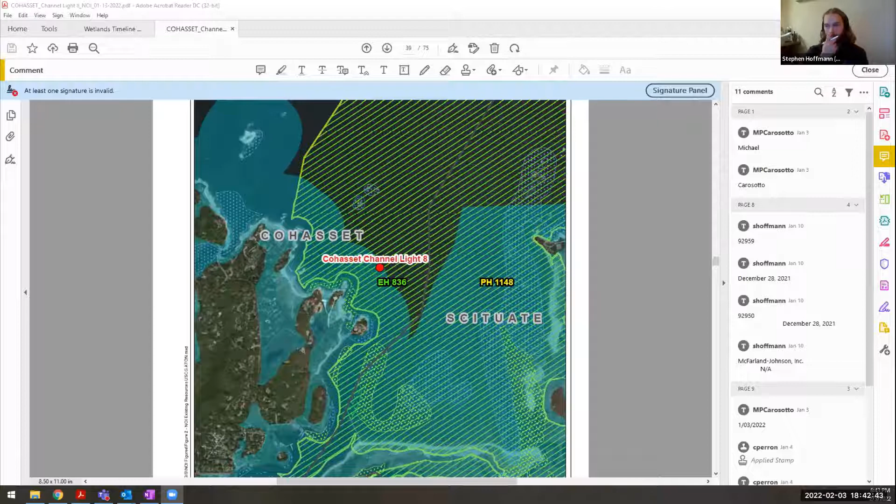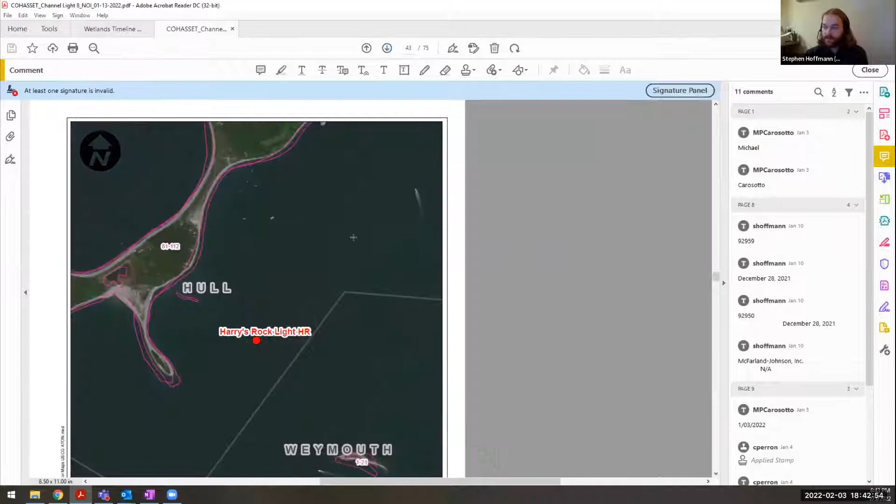So here's the location. I'm not familiar with any of the landmarks that you might be able to call out, but it's off the coast, approximately 1,000 feet or so, just off of Whitehead. Here's another figure without all the resource mapping on it that might be easier to see. Oh, okay.

Charlotte, do you have anything to add to this application? Yeah, I wasn't able to make it out to the site with the harbor master, but I did give her a heads up about this project and she didn't have any comments. I also forwarded it to the Department of Public Works, who also didn't have any comments. Instead of a site visit, I put my questions in the OneDrive for the commission, just in case they wanted to see what kind of questions I asked when I was reviewing the application.

I did see the correspondence back and forth, Charlotte. So thank you for the in-depth review there, and to the applicant for the comments that went back. I'm satisfied with the great questions, great review, and satisfied with the comments that came back. I guess it just looks like we would just need to condition this such that no activity would occur between May 1st and August 15th. Is that correct?

That's the BMP we included to avoid impacts to the terns that may be nesting in the vicinity during their active breeding season. After that time frame, the nest could be removed, it appears, shortly after the August 15th deadline, anywhere from September to February. In a perfect world you'd probably be shooting for an October, November, early December timeframe, since it doesn't really freeze out there, although it gets pretty cold.

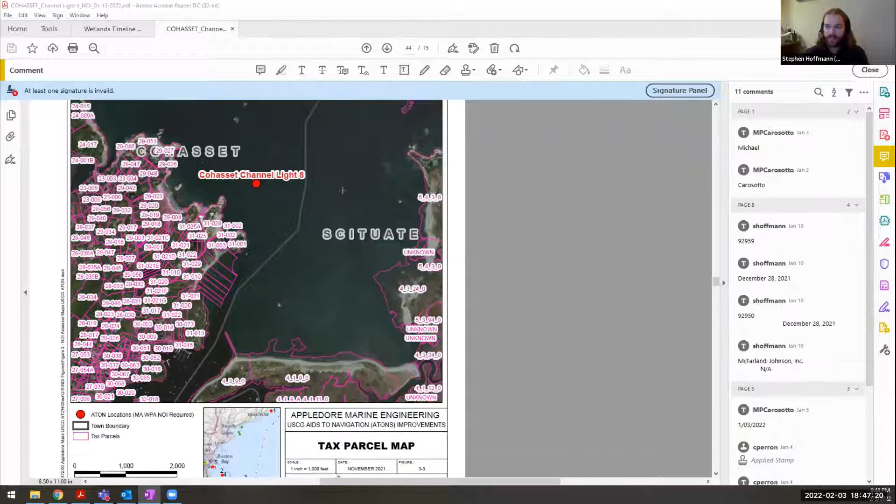As far as any sound or vibration concerns, the time of year restrictions are more out of an abundance of caution. I don't anticipate the vibratory hammer and driving of timber piles having effects felt or heard on land, since it's probably about 1,000 feet offshore. The time frame of construction is also relatively brief, looking at 2 to 3 weeks max, so it would be very short term and temporary in nature.

And how many of these are you doing on the coast? Looks like Hull, Weymouth there. How many structures are you putting in? There's 5 total, all replacement of existing structures that are just in need of replacement. You're going to do this over the course of a couple months, and once you start you're going to keep going? Yeah, that would be the plan, obviously dependent on weather and other factors.

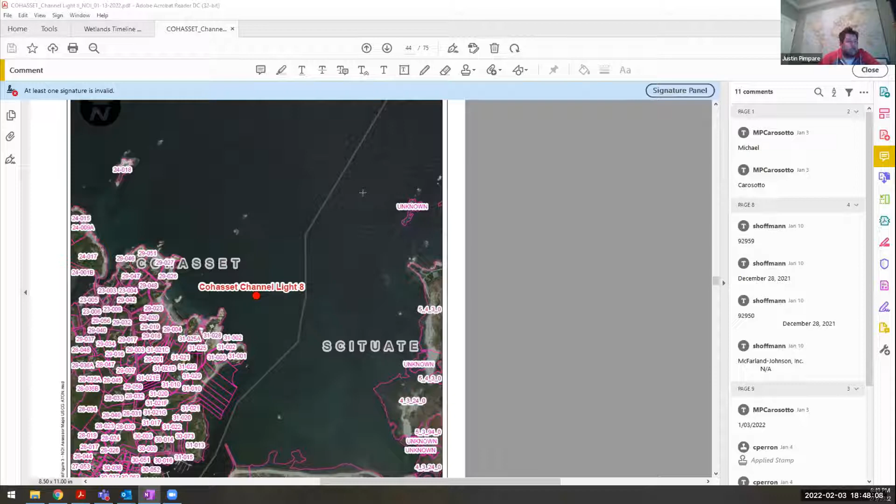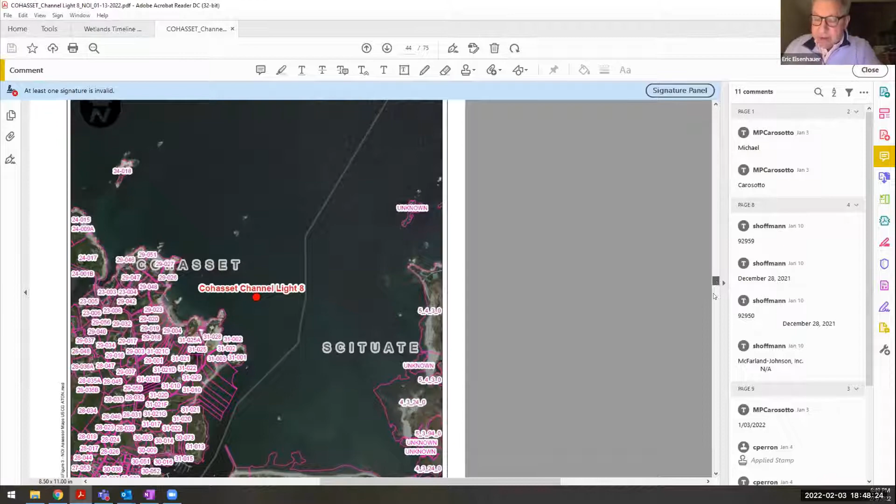Stephen, there's a number of diagrams here, pages and pages of unusual looking objects. Which is the one that's going in? Are you putting it in Cohasset? I see about 18 pages of drawings and photographs. You're looking at the plans? Yeah, I'm looking at your submission, I think it's pages 15, 16, and 17, but I'm having problems finding those numbers.

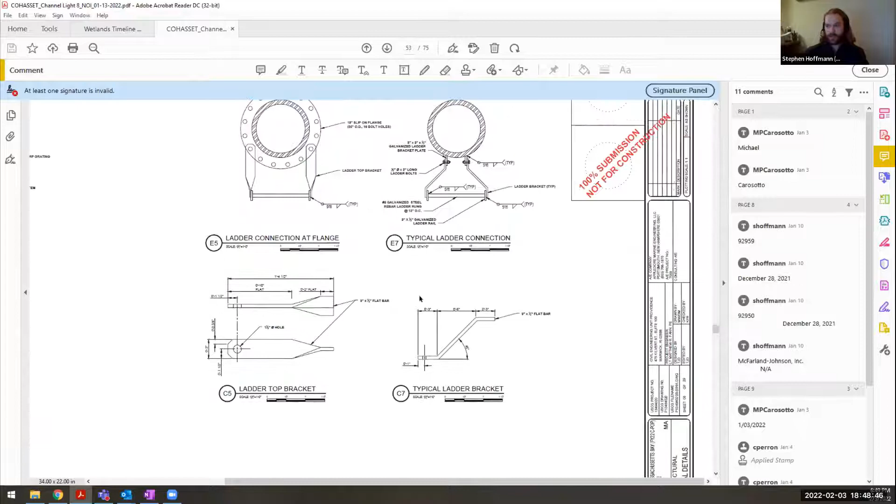I'm not sure, I'm sharing my screen still. Are you looking at the plan diagrams? I'm looking at Massachusetts Bay Repair Massachusetts, it's got all the photographs of the various items. Yeah, there we go. Which is the one we're getting? You'll see down in the bottom right corner, it says this is the Boston main channel light.

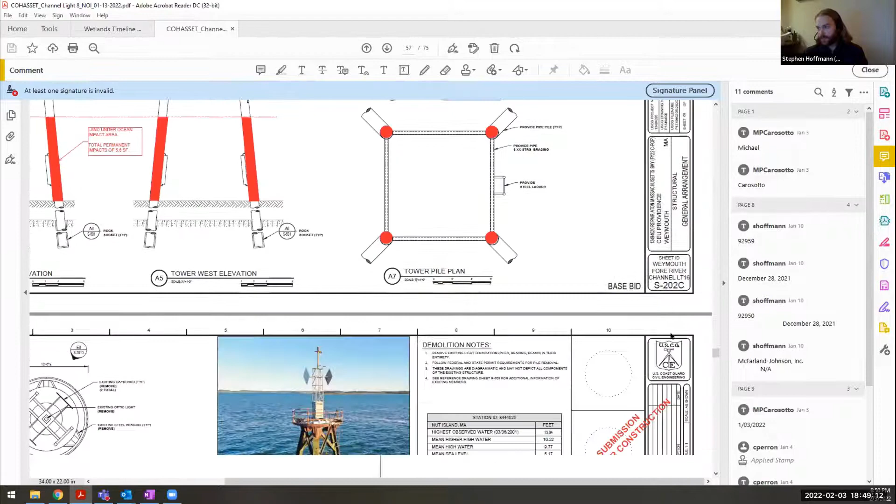So it's one project, we included everything, all the plans. Let me find the page numbers for you. Oh I see, here it is, that's it. It's kind of hard to view, I'm viewing it on my phone, my computer isn't working. Yeah, it's probably tricky to view these plans given the size of them on a phone.

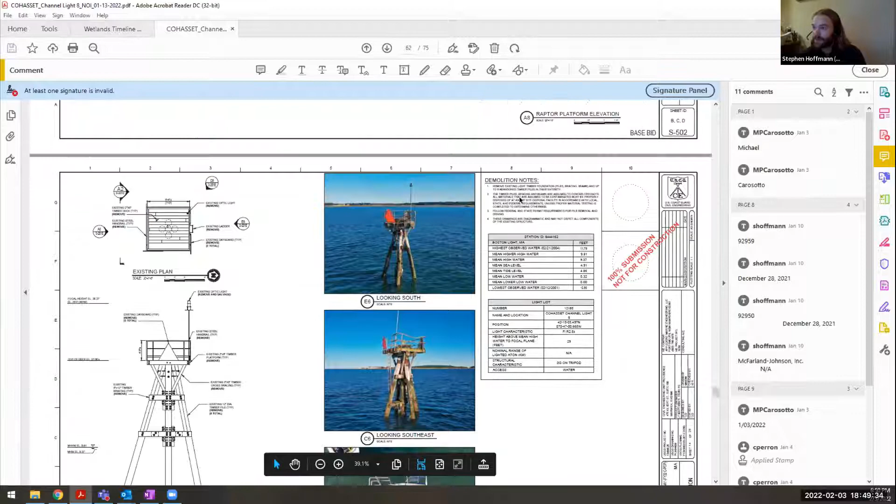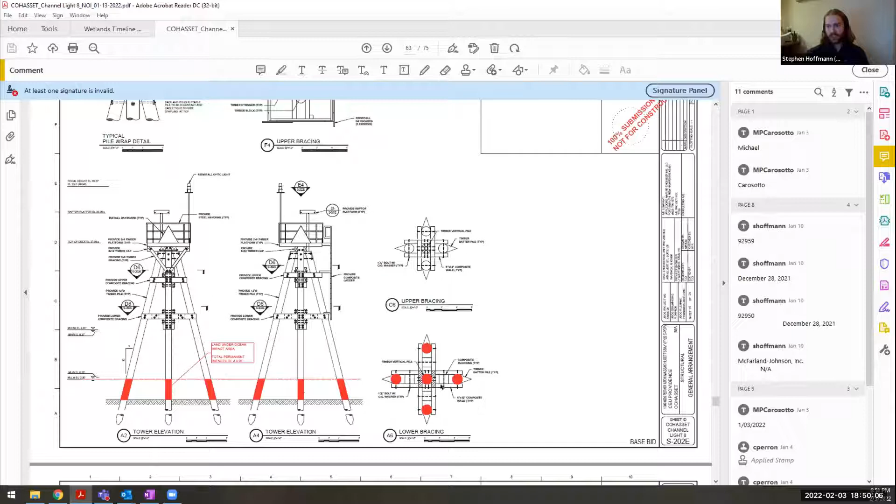In the PDF it's page 62, and you'll see down in the corner here there's a photo of the nest on the platform as well. So the object we're looking at now is what you're taking out, right? Yep, that's the existing structure. The proposed structure is shown here, which is more or less an in-kind replacement with some minor modifications to the nesting platform and those features, but as far as the structure goes, it's a 5 timber pile substructure, just like the existing.

Eric, in that PDF, it's on pages 14, 15, and 16. Okay, thank you very much. You're welcome, you're very astute. The right-hand corner of the bottom of the page, a little box that says okay.

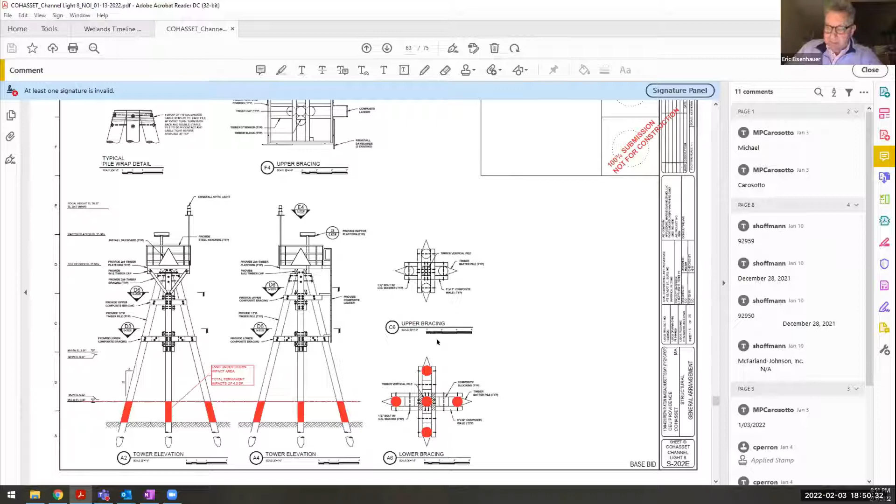What's wrong with the current structure? It's not necessarily clear in these photos, but it's an older structure. It's been there a while, I don't know when it was originally installed, but the timber piles are deteriorating and it's been identified as in serious condition and in need of replacement. It's just an old structure.

All right. Any additional comments? No comments. I'll entertain a motion.

Jay Pimparo make a motion to issue an order of conditions for the U.S. Coast Guard project NOI 22-03 with a specific condition that no activity is to occur between the time frame of May 1st and August 15th.

Do I have a second? Second. Having heard a motion, a second to issue an order of conditions for NOI 22-03, take a roll call vote.

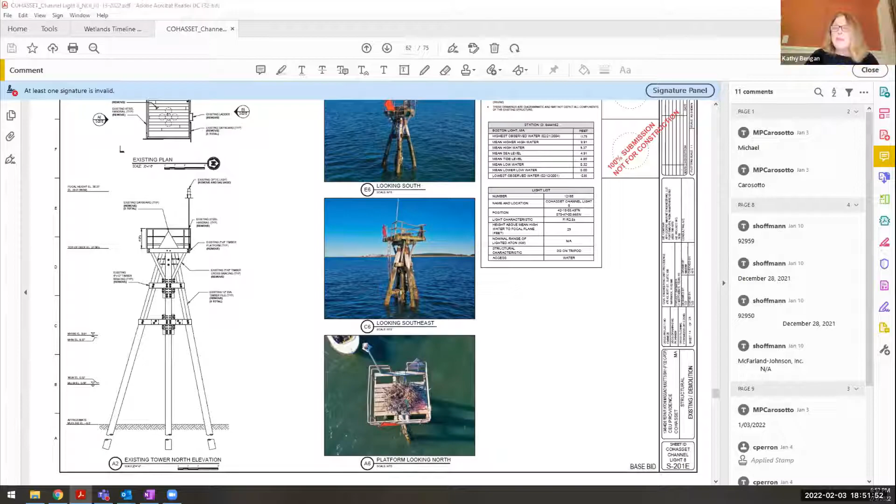William Ashton, aye. Tom Bell, aye. Kathy Berrigan, aye. Eric Eisenhauer, aye. Trish Grady, aye. Jay Pimparo, aye. Chris Macfarlane, aye. That vote passes.

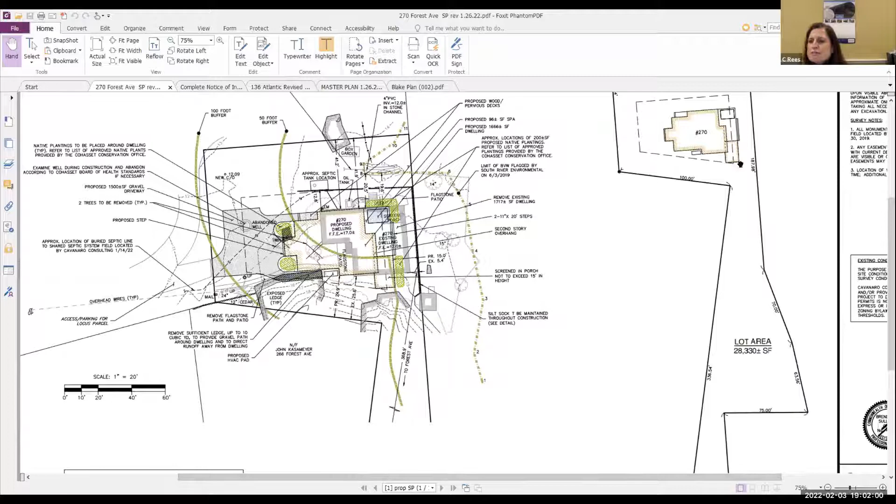Okay, there's nothing existing there? No, nothing existing there. That's for zoning. The existing home measures 5 feet from that property boundary.

There you go. Eric, if you give me a second, I'm just going to outline the existing. Thank you.

That's about it. He gets paid big bucks for this, by the way. I was gonna try to bring up my pen, but then it gets messy. Our chairman had a very steady hand.

That's the existing, and then the proposed is doing something like this. There's a 200 square foot covered porch proposed on the north side, but that's the majority of it. The porch is here.

Does that look better, Eric? Understand that? And then the patio, I'm just gonna make an X instead of an outline. Patio is there.

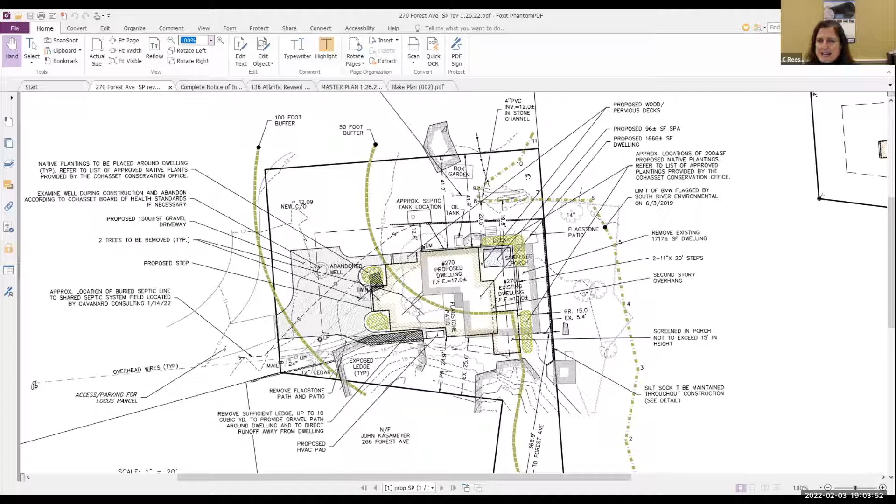What is the, kind of need some glasses to zoom in there, the existing foundation elevations, are they staying the same? Pretty much. They're gonna try to pretty much stay the same and take out the existing, is that 17 feet? 17 to 17. They're trying to kind of use what they can. So not really a lot of heavy excavation, it's more demolition than anything.

Yeah, I mean, the home does extend over here to the south, but yes.

So the only building that's happening within the 50-foot buffer that is not inside the existing footprint would be this small little corner right here. Is that correct? Correct, correct, yes. It comes up here, just that tiny bit, but it's only that little bit that's within the 50-foot buffer.

I think you double that, go up twice as tall. It really ends here. Yeah, but that would be within the existing footprint. Oh, correct, yes, you're right. I'm sorry. Yes, just that little strip is outside the existing footprint.

Chris, did you have the other drawing that you had the red ink pen on? Sorry, I got rid of it because once you move the drawing, it doesn't move with it. But I'll give you a quick one on the existing again, because it's a pretty simple shape.

So I'm gonna assume that there's no underground natural gas line to this part of town right now? No, and they're gonna keep existing utilities pretty much because the footprint overlaps. They'll probably truncate where they hit the house, but they don't plan on moving utilities.

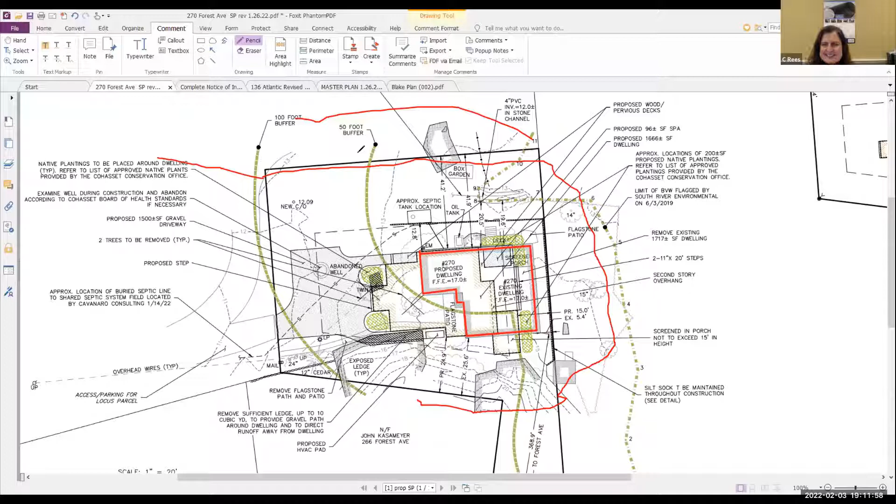Yeah, you're along our property line, but there's the neighbor to the west of that - there's a good portion over here, more trees up there, even higher. I'm sorry, you're saying that it's woods between that line and the house, or away from the line? Over here more, probably, away, or up north - so up is there, here.

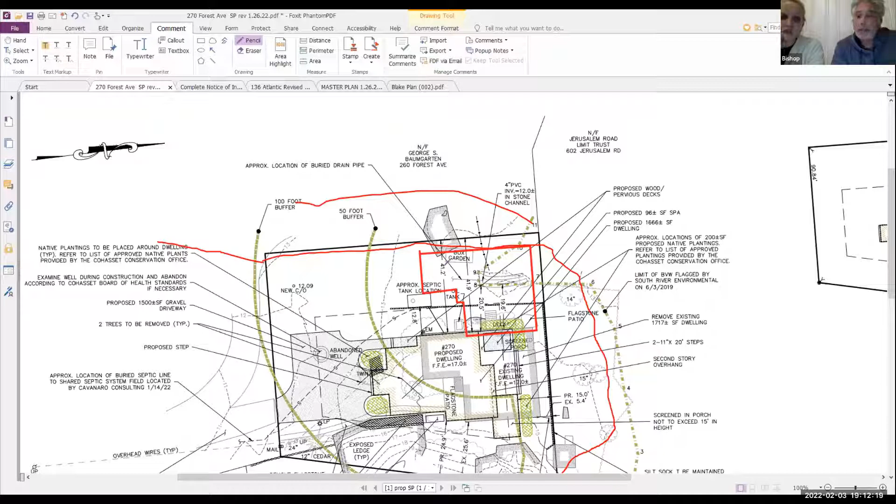Would there be an opportunity to plant some trees to replace the ones that have been removed? Yeah, absolutely - one of them's actually dead, and the other one we would love to replace. And I think there's a lot of opportunity on the plot to add plantings.

Any other questions or comments by commissioners?

No, my only comment is clearly there's a lot going on here. There's an existing home that is probably saving this project in the fact that there's a significant amount of work going on in the 50-foot buffer. However, there is an existing home. It appeared that the square footage in the 50-foot buffer of impervious area was being reduced from 1490 down to about a little over 1,000 square feet - so roughly about 450 square feet of impervious area was being removed.

It sounded by the removal or pulling back of the house from the wetland that the current house, now about 33 feet from the wetland, is being pulled back to about 48 feet. So when I look at these projects, these are some of the things I look at - trying to get as far away from the wetland as possible and reducing impervious surfaces. I commend the engineer for not just building on the existing footprint, and for being cognizant of the 50-foot buffer while dealing with the building setback. So I don't have any additional comments.

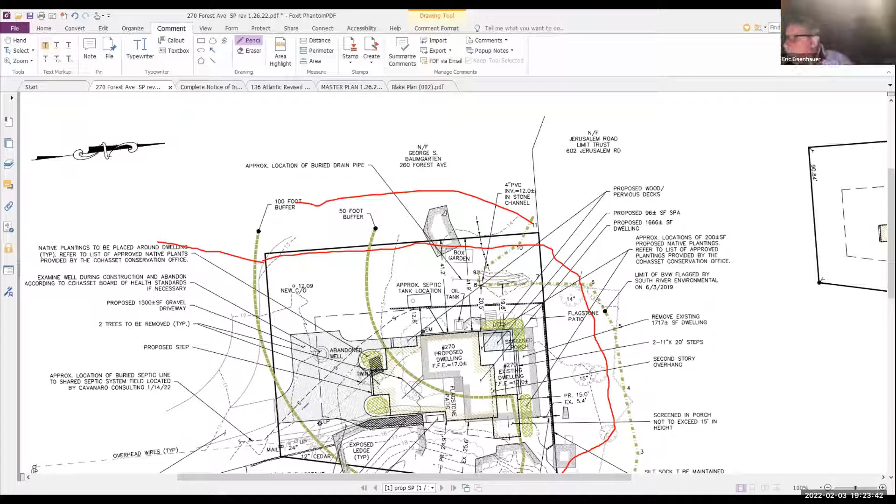Take a roll call vote. William Ashton, aye. Tom Bell, aye. Kathy Berrigan, aye. Eric Eisenhauer, aye. Trish Grady, aye. Jay Pampari, aye. Chris Macfarlane, aye. The variance passes 7-0. Thank you very much, good luck.

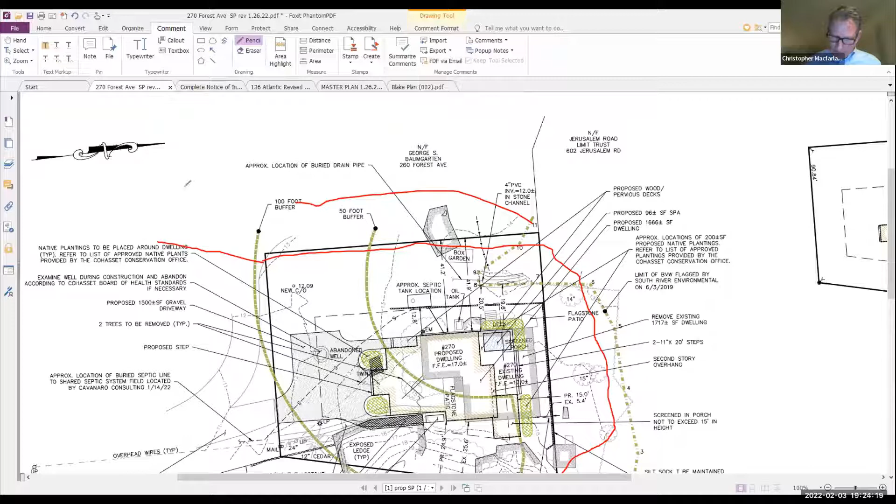The next hearing this evening, I'll read the notice of public hearing in accordance with Massachusetts General Law Chapter 131 Section 40, the Cohasset Wetlands Bylaw, and the Cohasset Stormwater Bylaw. The Cohasset Conservation Commission will hold a public hearing on Thursday, February 3rd, 2022 at 6:30 p.m. via remote participation on a Zoom platform for Notice of Intent 22-05 and Stormwater Permit 22-02 for Liana and Ethan Myers to install a pool, patio, pool house, and assorted hardscaping and landscaping at 136 Atlantic Avenue.

Caroline, I do not see the owners, but please correct me if I'm wrong. Okay, I can't see the participants. I thought... okay, sorry, yeah, I don't see Myers. It's Liana and Ethan Myers. No, I don't see him. Okay, if you're there under a different name, just raise your hand.

Just FYI, ladies and gentlemen, school's out early tomorrow in Cohasset, early dismissal due to the weather. It's your public service announcement. Thank you, good call. You get to sleep in, Jay. I didn't know about the early dismissal. Oh, that's early for you.

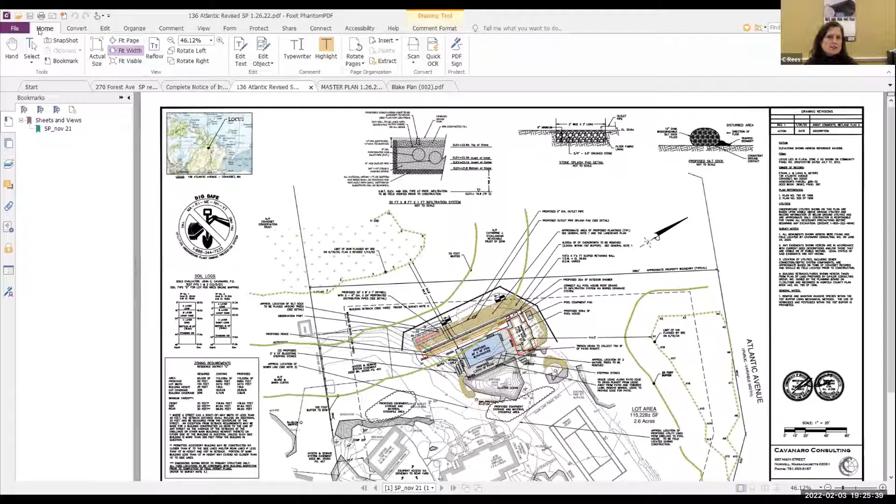Okay, all right, should I go forward? Yeah, could you blow this up a hair before you do? Certainly. For the record, my name is Caroline Rees from Cavanaro Consulting in Norwell, Massachusetts. I am representing the applicants, Liana and Ethan Myers, homeowners at 136 Atlantic Avenue.

The homeowners propose to construct a pool, patio, and pool house in the rear portion of their developed lot. This lot is approximately 2.6 acres. It borders Atlantic Avenue to the north and east sides. Here's the main dwelling, and it borders private properties on the remaining side. Atlantic Avenue comes around here; here's the dwelling, a driveway that comes up, a detached garage, a large tennis court area, and then in the rear yard is where the proposed work is. Is that big enough? Should I make that bigger?

Slightly bigger would be helpful. Yeah, a little bigger, please. Thank you. Certainly.

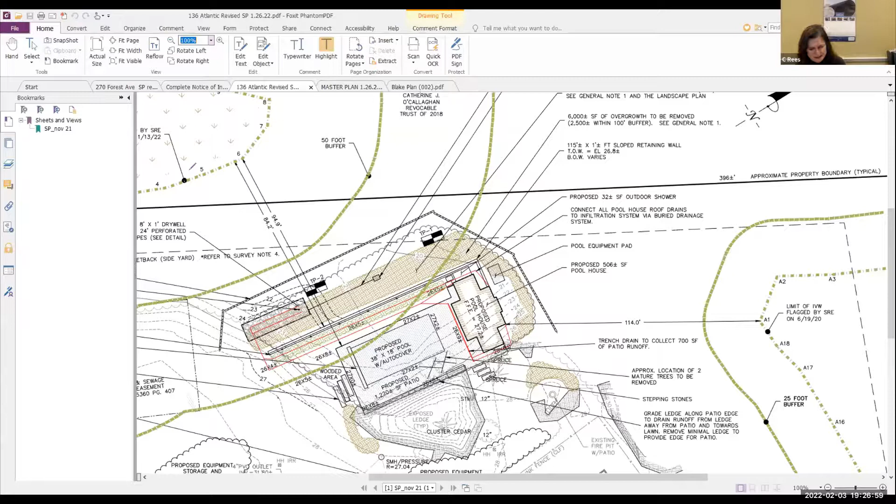That kind of shows it. On the lot, there are 2 resource areas that have been identified. One is a bordering vegetative wetland that extends from the east corner of the lot. The other is an isolated vegetative wetland on the north side of the lot, abutting Atlantic Avenue.

As you can see, a portion of the work extends into the 100-foot buffer of the bordering vegetative wetland. So a notice of intent was filed, and the project would increase impervious area, including the pool, by about 2,600 square feet. So a stormwater permit application was submitted as well.

The homeowners plan to petition to locate the pool and patio along this area ledge, using it as a natural feature. There's a very steep drop off of the ledge here, and they plan to abut the patio up to this ledge. There is a significant drop in topography behind the ledge, so they'll bring in some fill to support the pool and patio.

They'll support that with about a 115-foot retaining wall, with a max height of about 6.5 feet at the corner. There's also a 506 square foot pool house proposed here.

To address the stormwater issues from the increased impervious area, a 30 by 8 by 1 foot infiltration system was designed and is located at the toe of the wall. This will result in a decrease in peak flow and volume for all rainfall design events.

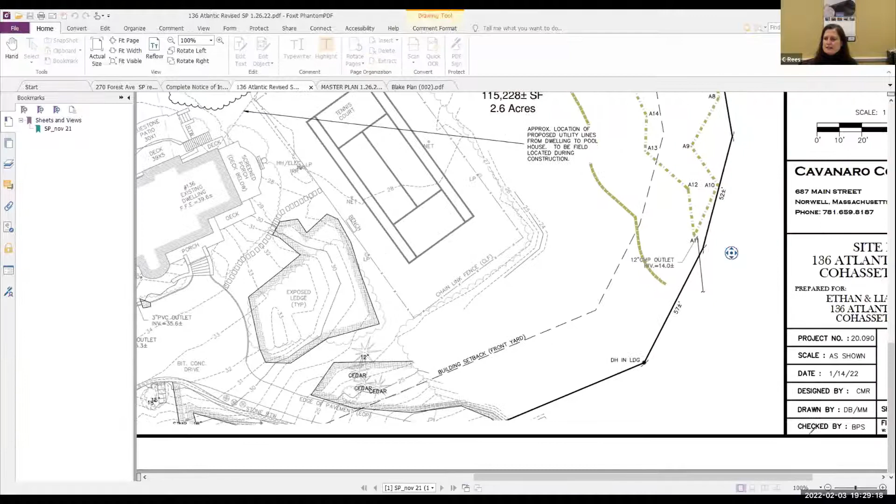The proposed work is over an area that's not really woods, more of a brush area.

What we found in some old plans from the late 30s is this area was developed as a garden area, so that may explain why there's more low-lying brush back in this area.

2 trees are proposed to be removed as part of this project. They're outside of the 100-foot buffer, but those are the only 2 trees of decent size that would be proposed to be removed.

There's significant landscaping proposed as part of this project. Up here in the elevated patio area, these plantings — I do have a landscape plan, I don't know all my plants, but I can bring that up. The plantings here are not native, but they are non-invasive.

There's some hydrangeas, and a dogwood that I think is a native tree, but I can bring up the planting plan. These plantings are separated from the BVW by the retaining wall, and then there are plantings at the toe of the structure. Within the 100-foot buffer, that's about 12,000 square feet of native plantings and grasses, which we're hoping will provide a buffer to the BVW in that area.

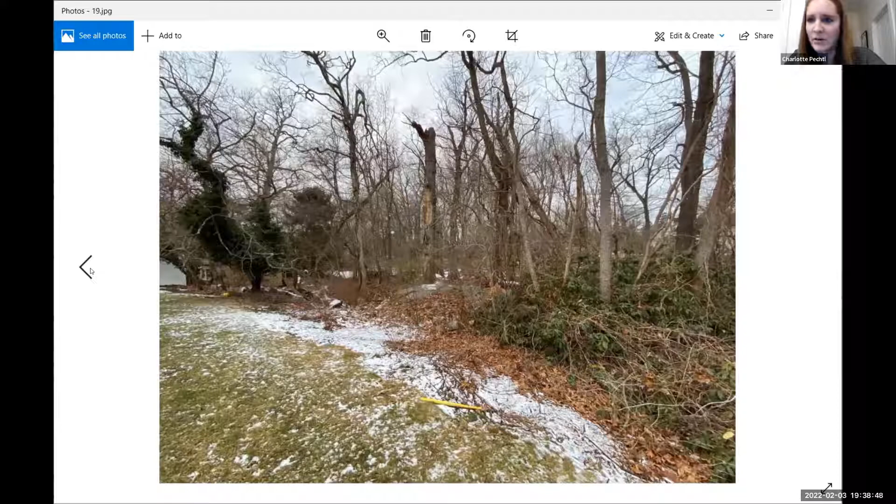And then those are just pictures of the wetlands flags that were in the back. Yeah, it's really kind of in that area. That looks right, because I remember the balls.

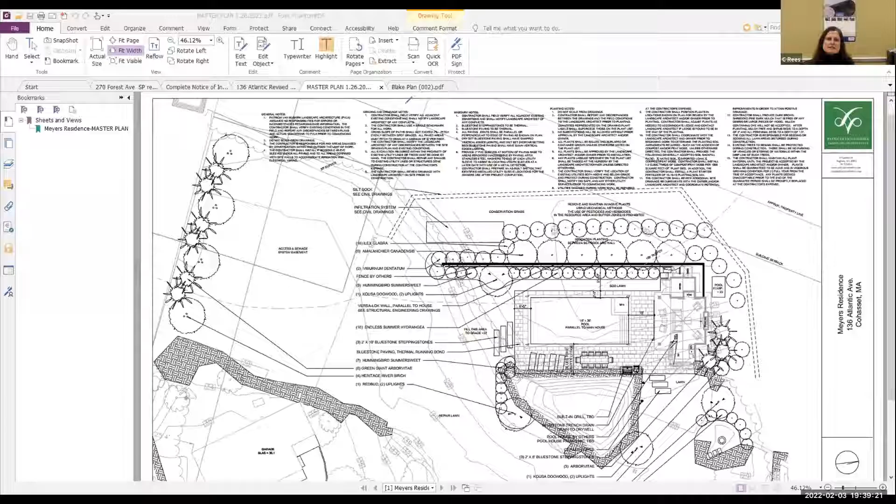I can tell. But Carolyn, would you mind sharing your screen for a moment and putting back up the actual diagram? My question goes back to the elevations, you might have to really blow it up. I'm looking at it on a different screen here. That's the landscape and then the site plan. Right, if you could blow that area up exactly right there, that would be great. Okay, that's actually a perfect size.

So I see that you've done two test pits. The test pits are in an area where it looks like you have decent soil, but they seem to be away from where there's actually going to be some true digging. The proposed 1,220 square foot patio and the actual pool, I'm assuming this is an in-ground pool, are right up against that exposed ledge. I know it drops off there, but my question is what are the elevations over there as far as the bottom of the pool? Is there going to be any digging into the ledge? Is it going to be a fill area or more of a cut area?

More of a fill area, quite a bit. Right here you can see this is elevation 21, 22, 23. They're bringing this area up to elevation 27, so there will be some cut and fill. What we can tell is they're hoping that ledge is deep, and they tried to leave adequate room to avoid having to blast ledge to place the pool. But the drop off here is about 23 feet, so you have about 4 feet of depth.

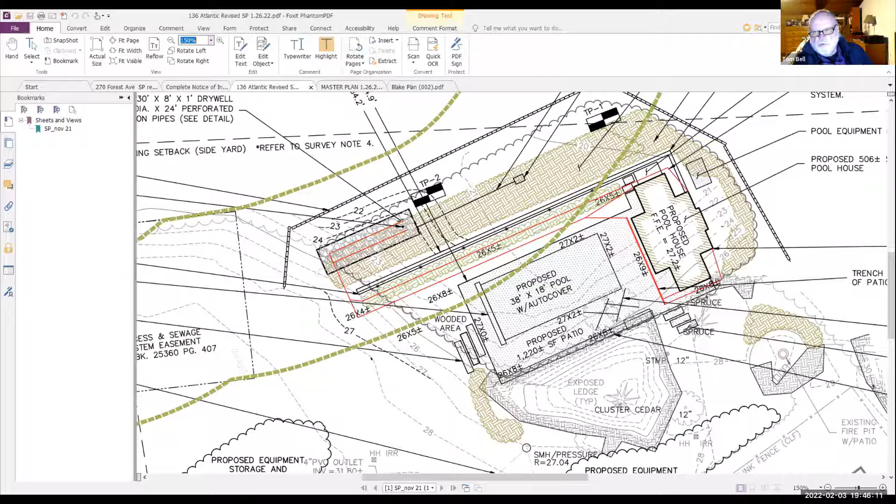All right, Tom, were you going to say something, Tom? Yeah, I want to get back to the classification of the resource. The state has indicated a potential vernal pool or pools on this property. Can you comment about that, Ms. Rees? Yes, we did find on Mass GIS a potential vernal pool.

It's located directly under the house, like kind of smack dab in the center. It's hard to tell where it was intended because the house is dated from the 1900s. So there's just a data point. It's right about here, right about the E in existing, I would say. But because it's located under the home as a potential, we couldn't really find out where that was intended. There's certainly not water under the home.

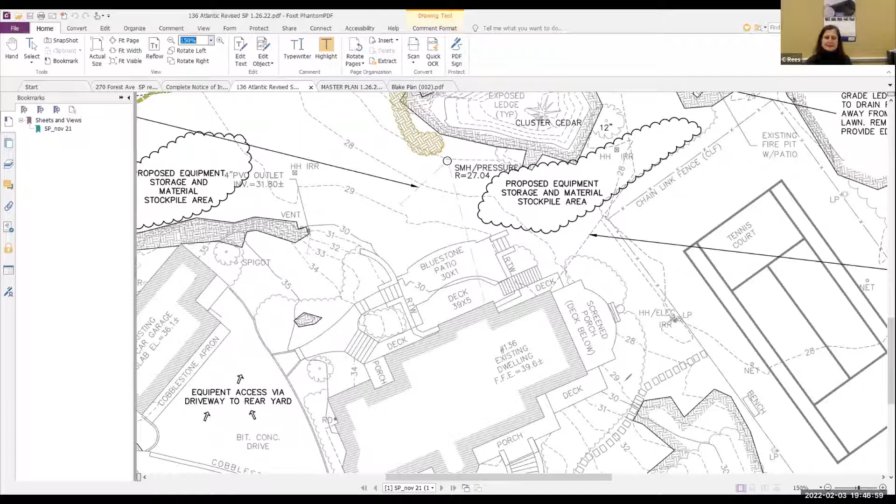The ground slopes away. Did you contact DEP about this? I know I haven't. Yeah. I took a look at this, looked at the topography here in detail, and I haven't contacted DEP either. It's my understanding that all of these were done, all of these potentials and all the potential vernal pools were done in one pass. I believe it was in 2010, if I remember right.

And so the people that did it are still around, and I think that it would be good to explore what they had in mind here when they put that marker. They obviously, that house predates 2010 by over 100 years. So my own feeling about it was that they put it, there's a number of potential, what appear to be potential vernal pools surrounding this property and on this property. And what I've seen they do in the past is they don't put a marker for each one. They put a marker in the centroid of the cluster.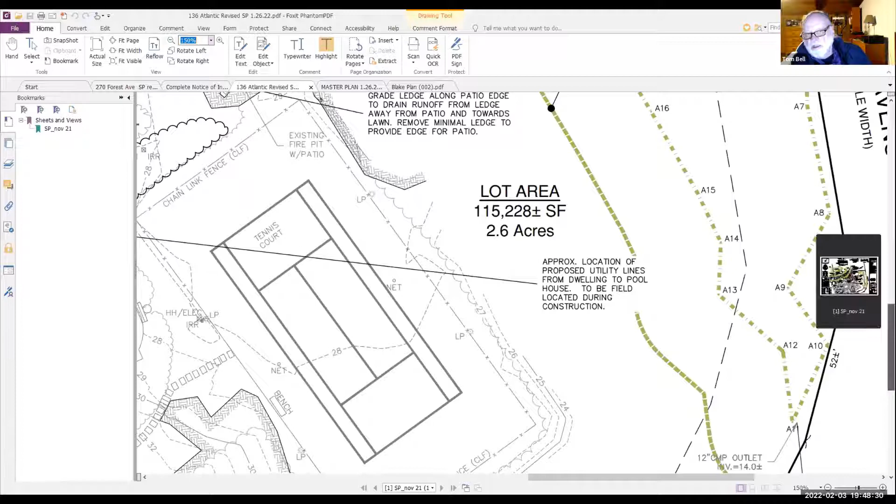So when you look at the topography of this, the so-called isolated vegetated wetland is a closed basin. It's like a bathtub. So that is probably one of the vernal pools that they've listed as potential. That's not what we were thinking - not an isolated vegetated wetland at all, but actually a vernal pool.

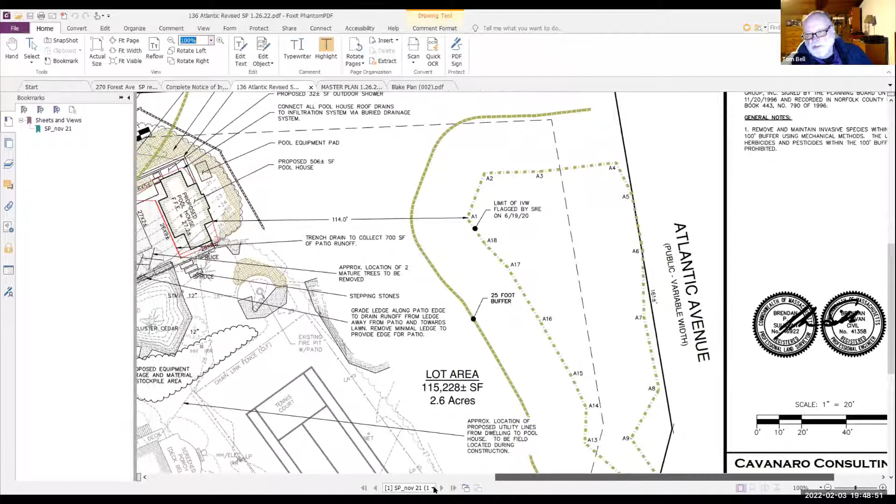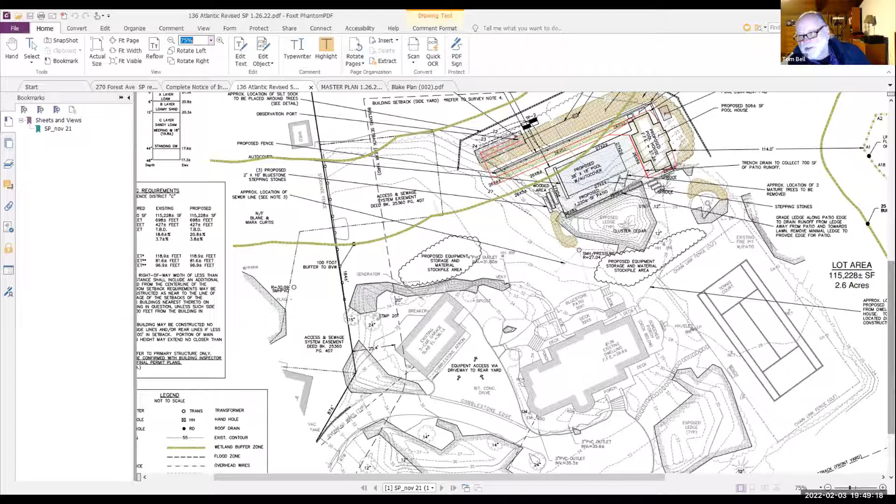Similarly, there's another closed basin just to the southeast of the pool area. It's actually substantially larger than the wetland scientist has laid out, which puzzles me because it's a fairly constant elevation and it's surrounded by a low area that is constant elevation as well. And it's certainly, if that's a wetland, it should all be at a constant elevation. And somewhere over here - I haven't transposed your drawing onto the digital elevation model, but it looks like what's been flagged by the wetland scientist is somewhat smaller than the topography would suggest the wetland is.

So the first thing I'd suggest is, I think we ought to all go out there and have a look.

The second thing is, I think that you should contact DEP and find out what they had in mind when they laid this marker down in the middle of the house.

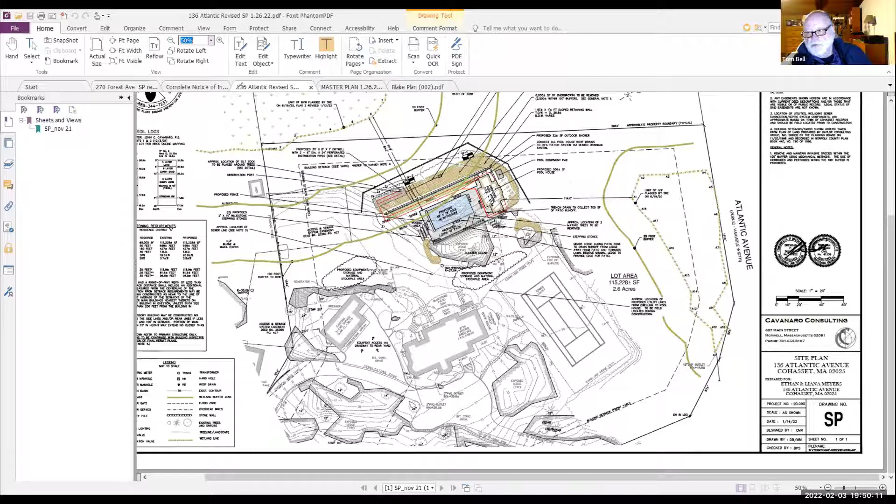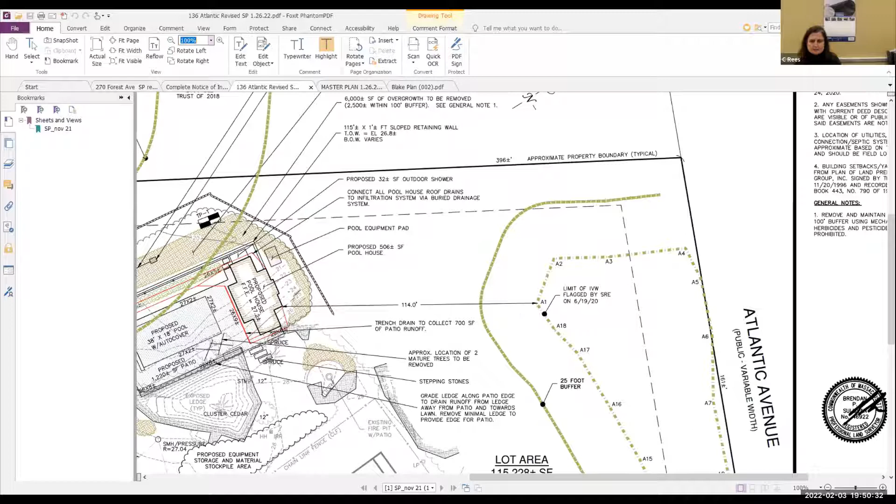Are you familiar with Cohasset's vernal pool regulations? I think it's 100 feet, correct? That's right. And within that 100 feet, do you know what the restrictions are? No touch, correct? Absolutely, no disturbance. Well, we did measure from the closest point because we suspected the potential vernal pool, it's not certified, but would be somewhere in here, and we have 114 feet.

Again, that limit of the IVW may not be the limit of the vernal pool. So it seems to me that it's close enough to take a closer look at this. And certification is not necessary in our bylaws, correct. All it has to do is meet the criteria for a vernal pool.

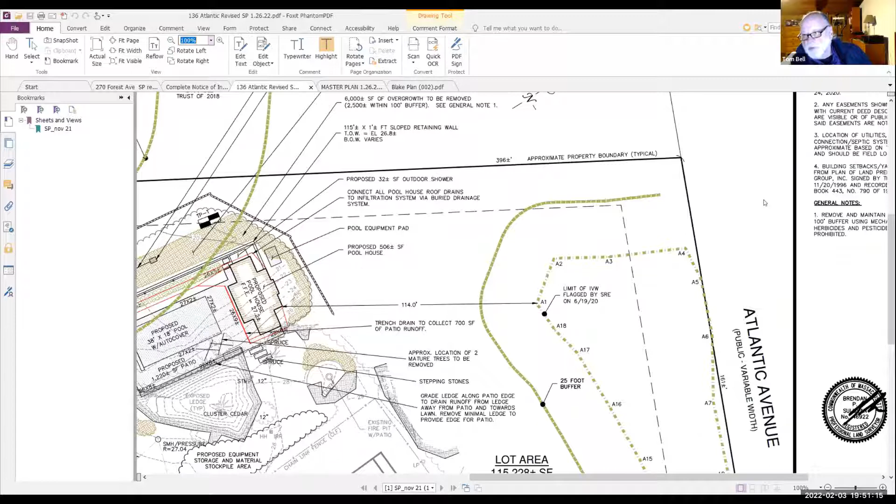And it certainly has a good start on it because you've got a closed topographic basin here, which makes it look like that's probably why the state identified it. They didn't actually survey any of these sites. They just identified, I believe from the 2006 digital elevation models, these closed basins, and that's how they identified all the potentials. Then at some later point, citizens or biologists went out and filled in the blanks on these to get them certified, but certification is not necessary in Cohasset.

It just has to meet the same criteria. So I think it's worthwhile for us to have a site visit. I think you should be contacting DEP, finding out why this kind of mysterious potential vernal pool marker is in the middle of the house.

I don't think they'll be embarrassed. I think they'll have a very good explanation for that. I suspect it is the centroid of distribution of pools. In fact, there's more of them on the other side of Atlantic.

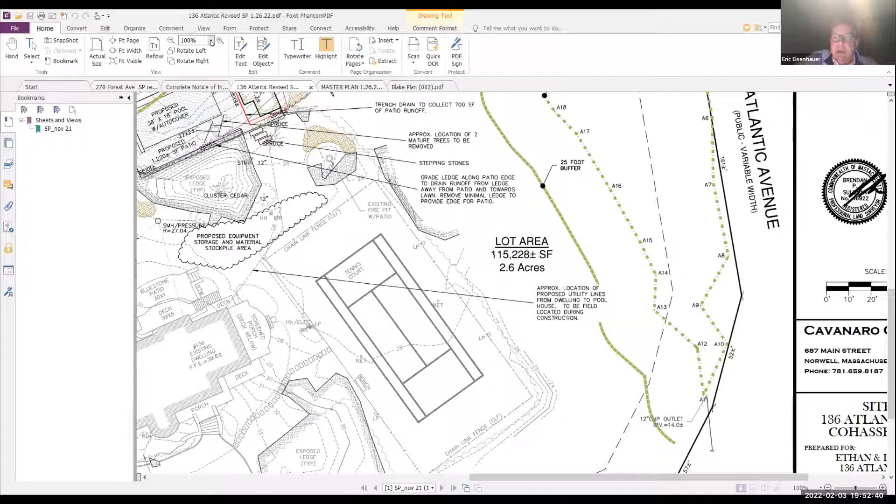Tom? I used to live there on Hobart Lane, and between Hobart Lane and Lothrop Lane, which is to the right of the diagram, if you cross over Atlantic Avenue, there is a very large area of continually wet wetlands there. Whether it's a vernal pool or whatever you want to call it, it certainly is not intermittent. It is always wet there and always marshy. That's the area where you see Atlantic Avenue written in the upper right-hand corner. To the right of that is the area I'm talking about.

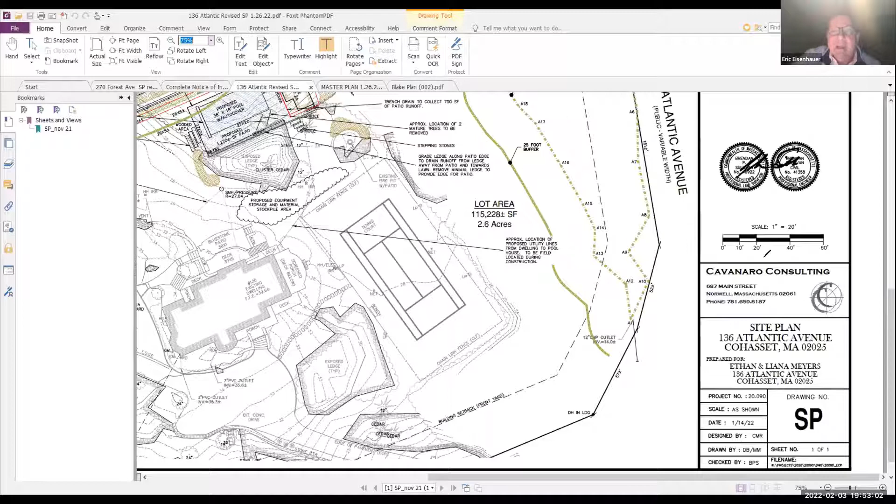Yeah, I'm familiar with it, Eric. I go past it all the time. And just to clarify this for commissioners and anybody else who's not clear on this, the vernal pool needs to be, not full of water, but continuously hold water for 60 days, sometime between January 1st and July 1st.

It needs to be cut off from any predatory fish so that the amphibians that breed there don't have any predators, at least no fish to eat their eggs and larvae. And then there is something called an obligate species, which is also part of the definition. Actually, there are a number of species. You can either tally a number of species that are a little harder to measure, or you can just find one, and that would be a wood frog.

That's considered the obligate species here, but there's a couple of ways to certify these pools. So another piece of the puzzle here is, does it have an outlet? It does. Neither of these have outlets. Well, there's an outlet located down here. They're closed topographic basins.

And we could establish that without any doubt with a proper level survey done with an RTK GPS unit, something that's good to about 5 centimeters. I'm pretty sure that the DEM is right. This is 2016, and the tolerance here is about 10 centimeters or less. So I think what I'm seeing on the digital elevation model is pretty good.

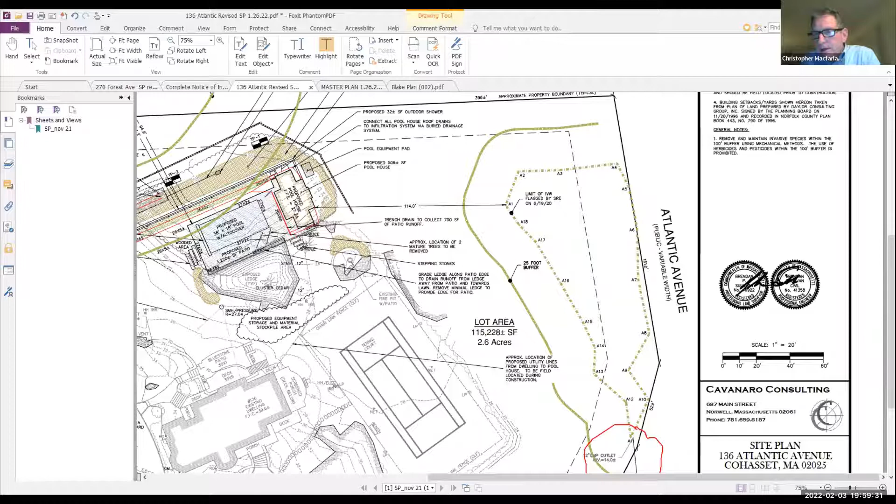Let's do it, I'd hope you'd agree. Yeah, I'm fine with that. So Charlotte, we'll need to publish it, right? It's got to be an invited site visit, correct? Yeah, I can look into that, but yes, we do need to get permission from the owners to come on the property, even though they've opened up a permit. It's just always good to obtain consent.

Yeah, but my understanding from Amy is that this also has to be an actual meeting, so it has to be published as a public meeting. Okay, I can look into that, but usually our site visits we don't deliberate, we mostly just go to observe. But if we want to make it a public setting to talk about our site visit afterwards, that would be a public meeting, yes.

No, I don't think we want to talk about it, I think it's just observation, but please confirm that with Amy. Sure, and then we'll look into that and reach out to all the commissioners to find a time that we can do this.

In the meantime, Carolyn would like to continue this hearing until February 24th. Please. Okay, and I'll look into DEP. Do you want me to go ahead and ask John Zimmer to reflag at some point, or wait for your site visit? No, I don't think that's necessary, but if he were there at our site visit to answer questions, I think that would be helpful. That would be something, I could relay that to him, and if you can coordinate with him, or I can get it to you.

I think personally, I don't see why we wouldn't want Mr. Zimmer to go out there and reflag that. If the wetland delineation was done in 2020, almost two years ago now, and we're looking at current conditions, I wouldn't be opposed to having it reflagged.

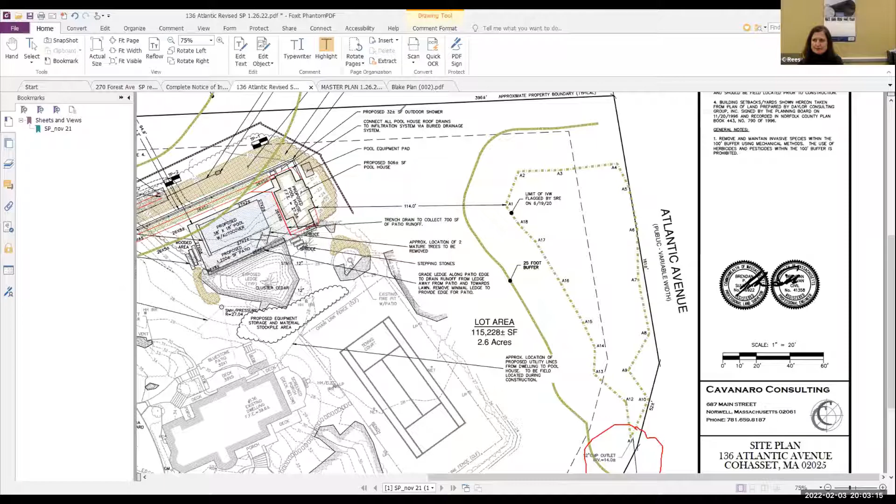Thanks, Carolyn. Our next hearing this evening is for RDA 22 - it's got the wrong number on it. Oh no, it's RDA 22-04 for 390 South Main Street.

Reading the public hearing notice in accordance with Massachusetts General Law, Chapter 131, Section 40, the Cohasset Wetland Bylaw, and the Cohasset Stormwater Bylaw: the Cohasset Conservation Commission will hold a public hearing on Thursday, February 3rd, 2022 at 6:30 p.m. via remote participation on a Zoom platform from applicant Gordon Stevenson for a request for determination of applicability 22-04 to add a 40 square foot addition for a screened porch within the 200-foot riverfront area at 390 South Main Street.

We have Cameron Larson in the audience raising their hand. I don't see the owner or Brad Holmes who submitted the RDA, but I don't know if Cameron Larson is presenting this one. Do you want to promote them? We'll promote both and find out. And then we have someone listed as OSPP, so I will promote them too - they're also raising their hand.

Good evening, Commission. This is Cameron Larson with ECR, the office representing Gordon Stevenson for the RDA. I'd be happy to begin the presentation whenever you like, and if I may share the screen, that would be great. Absolutely, Cameron, go ahead.

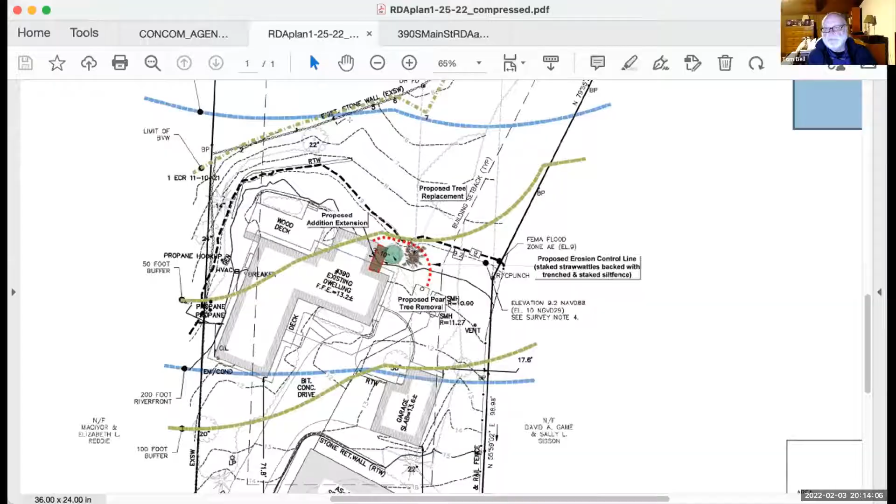William Ashton, aye. Tom Bell, aye. Kathy Berrigan, aye. Eric Eisenhauer, aye. Trish Grady, aye. Jay Pampari abstains, and Chris McFarland says aye. So that vote passes 6-0-1. All right, great, thank you very much, commission.

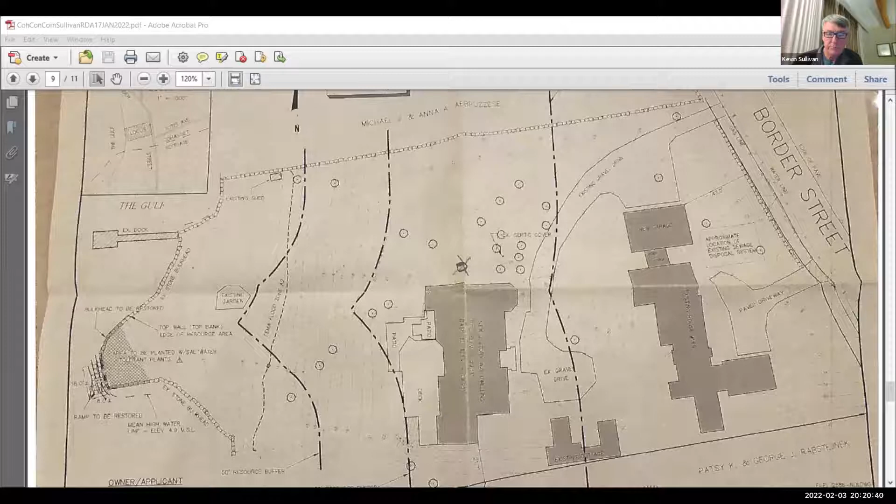I remember Chris Kennedy told me a while back, he said, Eric, if you want to determine whether you should cut down a tree near your house, talk to your insurance agent. He'll make it very clear: anything within 20 feet of your house, that size should come out. Now that's not Concom talking, that's an insurance agent looking at claims and risk. And I tend to agree—big trees like that should not be located within 10 to 15 feet of a house, just for the safety of the inhabitants.

And for the 200-foot riverfront area, we don't have anything qualified in there as a test that has to be met, I don't believe, Chris. No, I don't believe so. It's really judgmental.

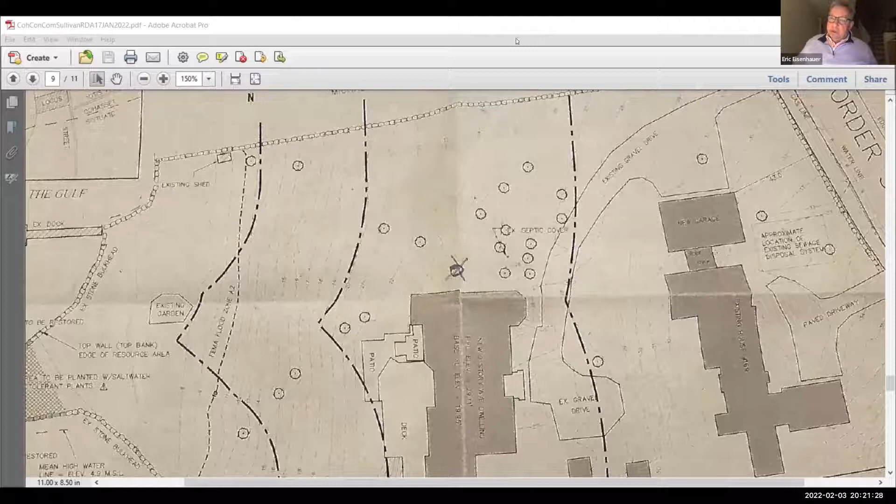Any comments by any other commissioner? Your proposal, Kevin, is to take it down, not to prune it further?

We like the tree, actually. It's beautiful, and I hate to see it go, but I don't see a way—if we take out the really high-risk branches that hang over the house, it's not going to make the tree viable, in my opinion. Yeah.

Okay, well, my proposal is we'll plant another white oak somewhere in our yard that compensates for it, a bit further away from your house. Yes, much further. Well, that's great. That's great.

So I'd like to—this would be a negative 2 determination, correct? Because we have no conditions to go with. So I make a motion to approve—I'm sorry, it's a motion for a negative 2 determination, which allows the work to be done at 169 Border Street. Do I have a second?

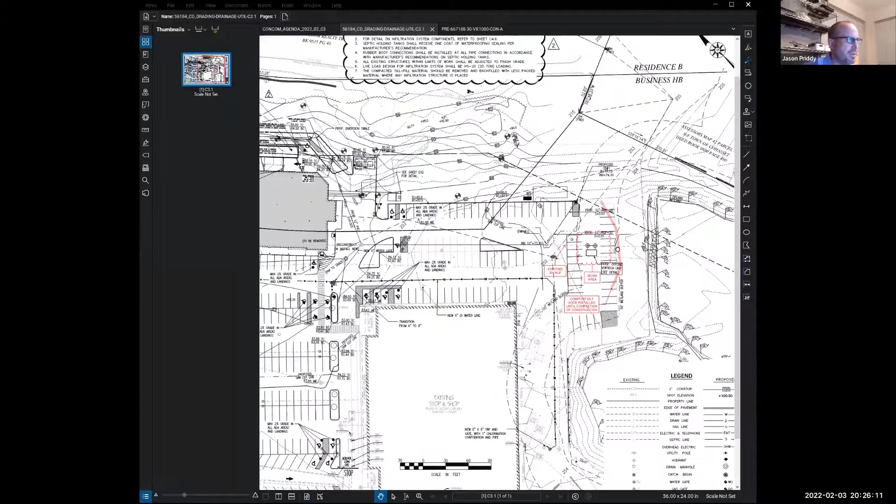This is the location of the Stop and Shop, the existing grocery store. In the back corner of the parking lot is the area that involves this application. We are proposing the installation of a water quality unit made by Contech Engineering to provide additional water quality for the catch basins within the parking lot. This is between the 150 foot wetland buffer, with the 100 kind of on this side behind it, and the 50 just on the other side. This is a previously disturbed area, being the existing parking lot here.

I have a list of points to note. It's a fully paved area and will be repaved at the completion of this activity, and because of that, there's no change in pervious or impervious area. The area would be protected with silt sock erosion control during installation, and that would remain in place until everything was complete and restabilized. We're expecting the installation to likely be done in one day, up to potentially a day and a half, so it should go pretty quickly.

At the completion of the installation, it will be repaved and return to its use as a parking lot. Based on these conditions, we're asking that the commission consider a negative determination impact, and we're happy to answer any questions.

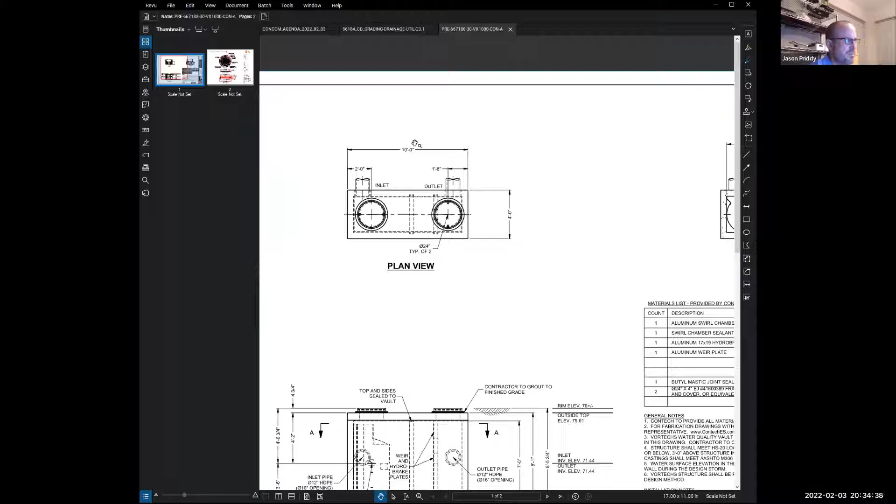I do have kind of a cut sheet for the unit here. It's a substantial unit, 10 foot by 4 foot as far as a footprint goes, and it is sized to handle and accommodate the volume of water associated with the parking lot.

So you're required to remove 80% of the total suspended solids. Is that correct? Yes, I believe that's correct. Are you required to remove oil and grease, gasoline, whatever?

No, that is not a requirement. So basically you're meeting the regulations, but at the same time, we've got...

5 or 6 acres. How many cars park here every day? How many of them leak? And all of that is going into that wetland, and what drains into that wetland, some of it goes to recharge the aquifer that we draw water from at Ellms Meadow, just about a mile downstream, and into our municipal water supply.

This isn't your issue, isn't your fault. It's kind of short-sighted on the town's part, I would think, not to have more stringent protection of our water supply. And that's my point here, not that you aren't meeting your requirements.

Clearly, we're going to approve this. I suspect we're going to approve it because you comply with all the regulations. But gee, us as a town, I think we're failing here, at least on this issue. That's my point.

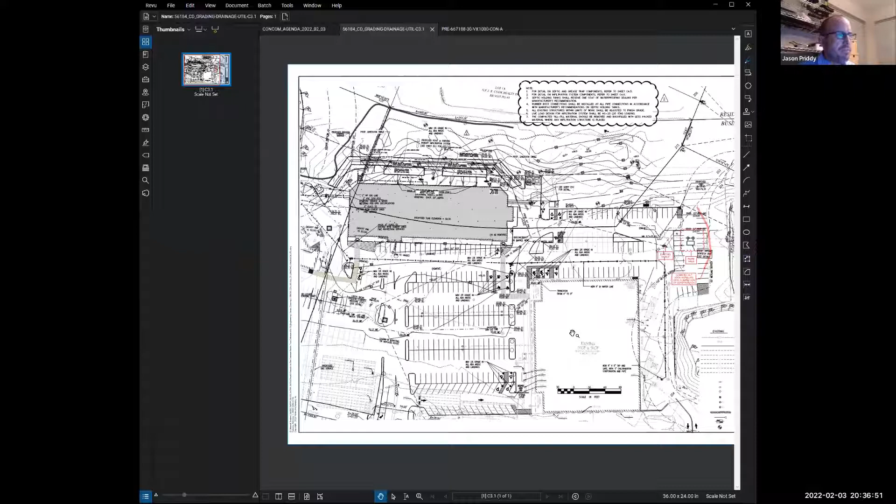There absolutely are oil water separators on the market. I've never seen one installed in such a way that it would handle stormwater flow coming off of a parking lot, though.

So nothing that you're aware of that's adequate to deal with this problem. Not in a traditional way, correct. I mean, you can flow stormwater through grass swales and such, and have it have kind of an environmental impact as far as scrubbing the water in that fashion, but there are not any traditional methods.

What about rain gardens? Do they remove at least some of the oil? Yes, sir, that'd be similar to flowing it through a grass swale, but anything that slows the water down and has it move gradually through a landscaped environment does provide water quality benefits.

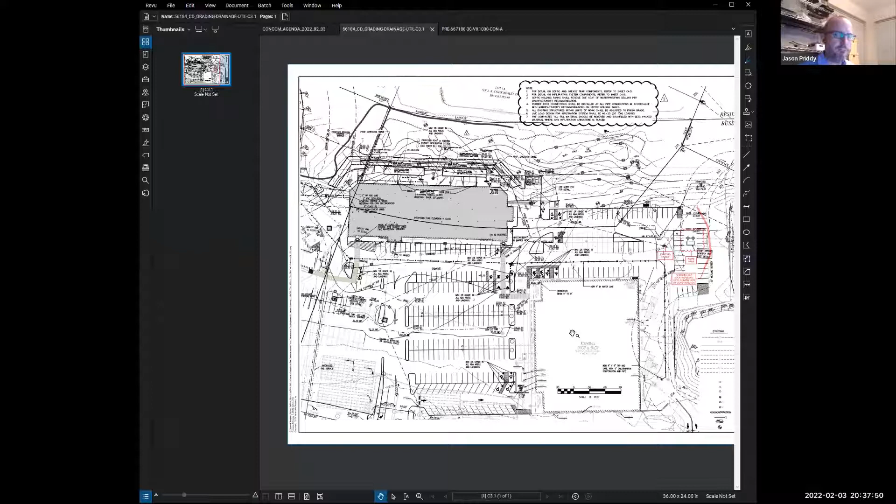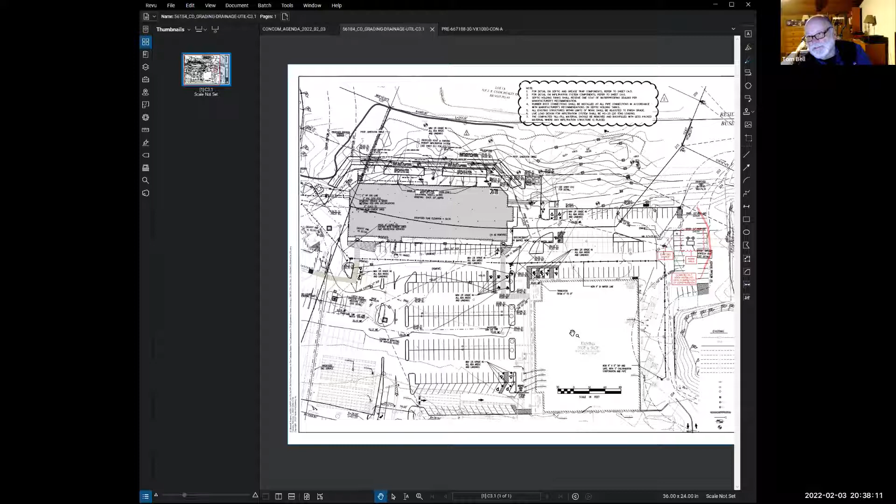So I've been here, I don't know, 12 years. I wouldn't call myself exactly a loyal shopper at Stop and Shop, but I do shop there from time to time. And it's rare to see cars parked where you've got your device going in, and looks like there might be room for a rain garden there.

It's so close to the wetland. Look at this. Yeah, you know?

Yeah, the outflow is about 40 feet away. It would have to be voluntarily done, I suppose, but it really gets back to this issue of we're going to drink this stuff. Presumably it's pretty well treated, and it's unlikely we're going to get very much oil and water in our glass of water from this parking lot. But all of these things start to add up, and it just seems like this would be a good place to put a rain garden instead of just something that separates the silt and sand off the parking lot.

Every time they pave something, we've all seen what happens on freshly paved streets - you can see an oil sheen coming off of it. Some people think it's a good idea to paint their driveway every year so it's nice and black, even though it doesn't really do much to preserve their pavement. And all that stuff goes into our water supply.

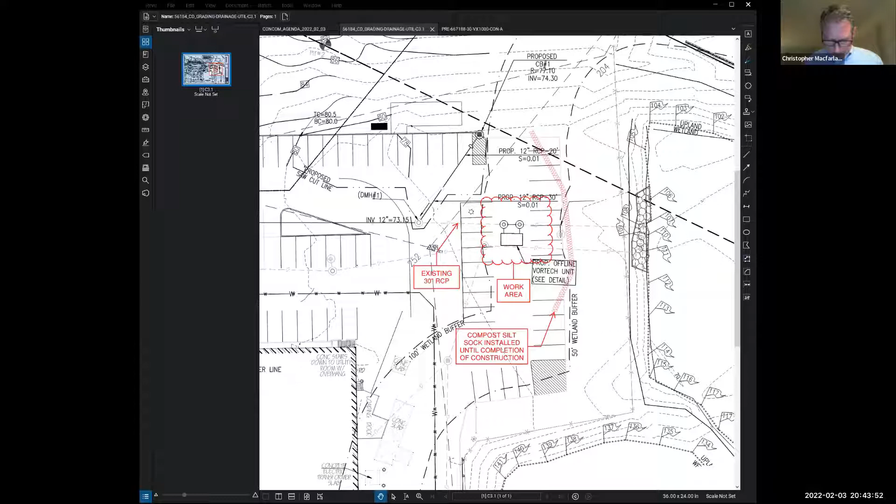So this would be a -3 determination with the condition that if the applicant researches the oil water separator and determines that they would like to use that type of system along with the sediment system, they could go ahead and do that.

Do I have a second on that? I'll second that. Okay, we're going to take a roll call vote for the -3 determination. William Ashton, aye. Tom Bell, aye. Kathy Berrigan, aye. We lost Eric. Trish Grady, aye. And Chris MacFarlane, aye. So that vote passes 5-0-0.

Thank you very much, Jason. Appreciate it. Thank you.

So our next hearing tonight is NOI 22-01, which is a continued hearing from January 6th. It's the moving of a shed at 138 Atlantic Avenue.

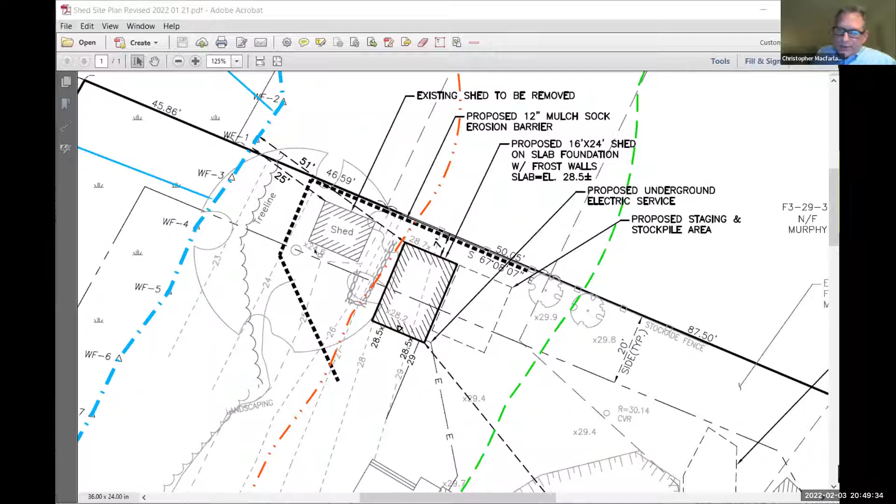Do we need a variance, Chris? Are they working in the 50? Well, they're taking it out, to remove the old shed. Yes, I'll make a motion to issue a variance for work within the 50-foot buffer at 138 Atlantic Avenue. Do I have a second? Second. Having a motion and a second, take a roll call vote. Will Ashton, aye. Tom Bell, aye. Kathy Berrigan, aye. Eric Eisenhauer, aye. Chris MacFarlane, aye. That vote passes 5-0-0. Great, thank you very much. Thank you. Thank you.

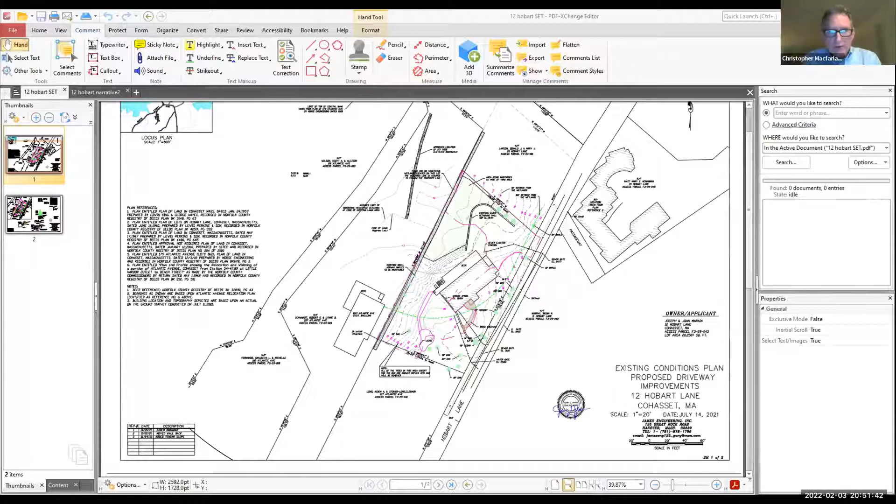Okay, why am I having a hard time here? No, you're sharing right now. Yeah, I am sharing, oh okay, that's it. Oh all right, it's on. I have two screens so I'm kind of confused here. You'll have to excuse me.

This is the first sheet, which is existing conditions, which still remains the same. It's what everybody's familiar with: the existing driveway, the wall holding up the driveway, the ledge on the left side, and in this area on the back side that's currently being maintained as a lawn area. At the time we walked it, I think it had been cut down. You can see the stone wall along the property line.

So what we are now proposing is, let me blow this up a little bit, we're actually proposing now to reduce the overall scope of work associated with this, pretty much just the driveway, right in here. At the request of the abutters, we're not even going to put the stone wall in. We were proposing to utilize a reinforced earth embankment so there wouldn't be any stone walls against it, so they wouldn't even see the stone. We've also proposed to add an additional 17 arborvitaes along this, just to provide some screening for the abutters from that embankment.

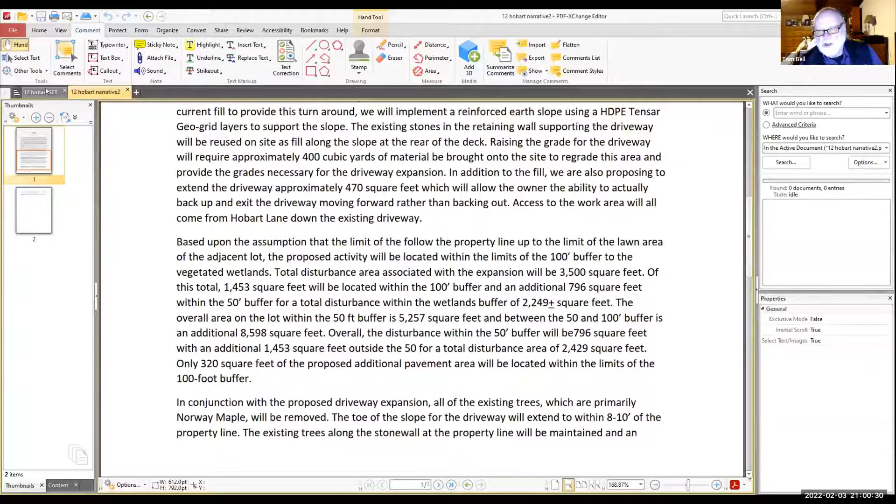I don't see a wetland delineation here, first of all. And secondly, this whole issue of the lawn — if somebody's put a lawn in a vernal pool, even if they did it two or three years ago, we might really consider a show cause hearing here. It looks to me like the wetland's been filled below that existing block wall. Not filled, but at least devegetated and replaced with...

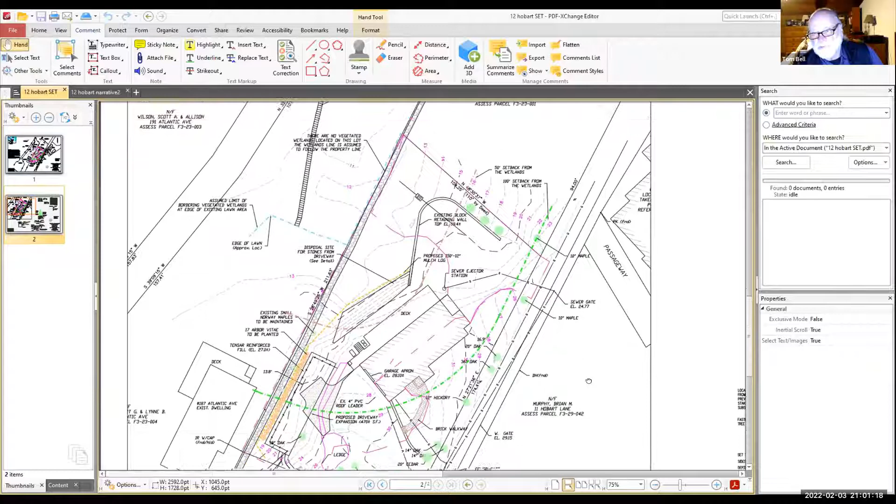Maybe you can call a lawn an invasive species, huh, Eric? It's absolutely the worst invasive species. Well Tom, I think it looks to me, based on the topography, that the wetland on the southeast side of the wall has been invaded, modified by a lawn, and the original wetland plants have been removed. When you start looking at the contours on this map, they're typical engineering contours where they've got a few points and then draw some wiggly lines, or the computer does. But when you look at a digital elevation model, you see the elevations here are really flat, and there's a rim around this bathtub, and it goes right through that lawn.

So there's no way I would consider any of this until we actually have a wetlands delineation here. And obviously, since the wetlands plants have been removed, if they were there, this would have to rely on hydric soils. I'd feel pretty uncomfortable approving this if a test pit was put in on the northwest side of this wall and we found mottling just below wherever the sod had been laid in.

I have a suspicion that I'm gonna let Paul answer that, because this was Paul's determination in terms of whether or not there was even a wetlands on this side. So I'm gonna let Paul respond to that. Okay.

Paul, you're muted. Can you hear me now? Yeah, there you go. Okay.

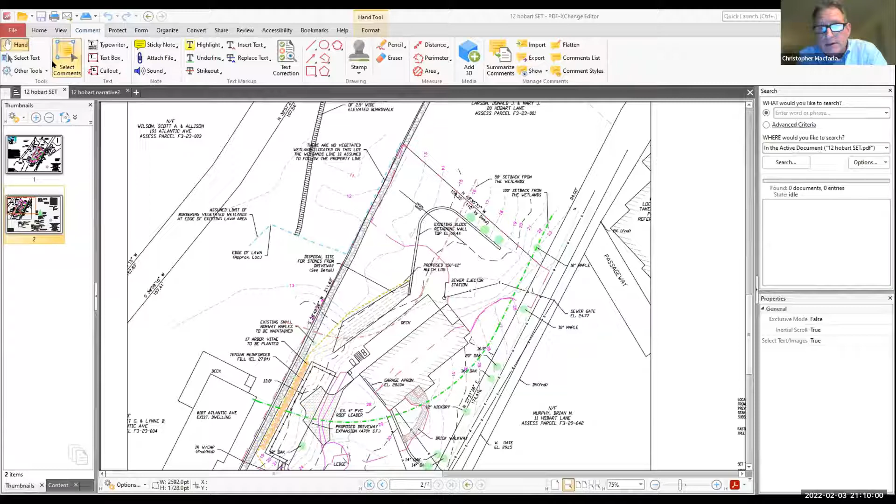So I think that we really have two courses of action here. One is to take a vote, or the other, which I recommend, is that we have a third party delineate the wetland and verify exactly where that is and where the 50 and the 100-foot buffer are, and go from there.

I will say that with the fill in the 50-foot buffer, I would not approve this plan based on the fill in the 50-foot buffer. I don't know whether or not you provided details for the Tensar wall.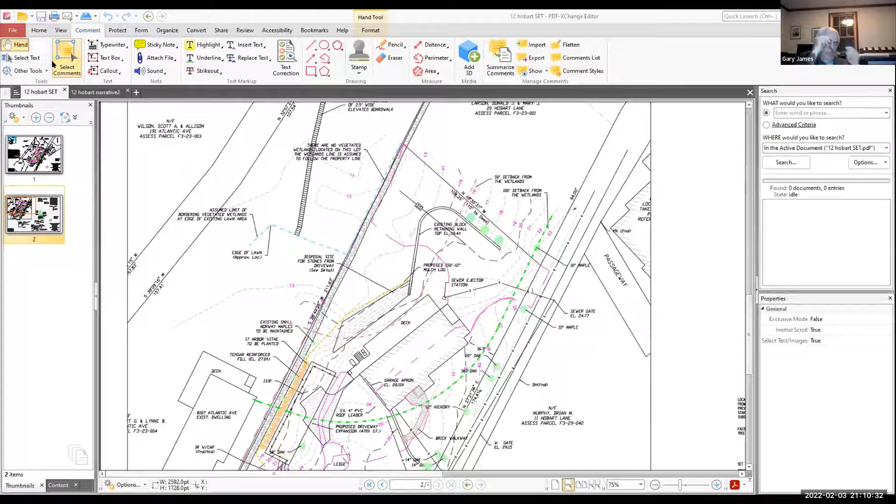Yes, I did, sir. Are they wraps? Yeah, they're wrapped. In fact, I'll show you the detail. So what's the face on the wrap? Anything? Oh, it's just the tensar grid gets wrapped around. So it's just bare earth within the tensar.

Well, there are slots in the grid itself, and what you do is place vegetation in the slot. Primarily it would be ivies and grasses. Calling for ivy in the grass? Okay. Right. But also, essentially, it would be a living wall at that point in time.

I'll also mention to you that I'm taking my Conservation Commission hat off and putting my other hat on. The arborvitae will never live in that location. There's far too much shade. They're going to be under competition from the neighbor's Norway maples. You're not going to have any luck at all with the arborvitae in there. So just a heads up for you.

Would you rather we went to Western Red Cedar?

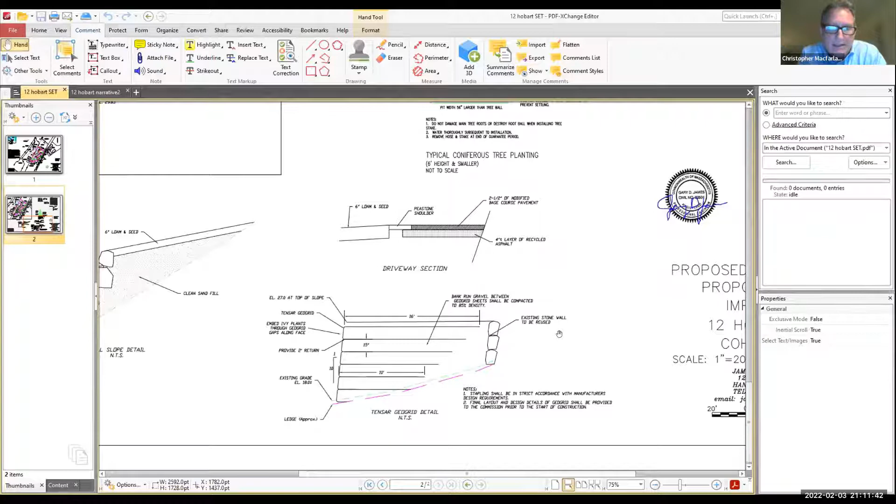Gary, if I can say something, I think we ought to go and get the delineation done and stop. No, I agree with that, I'm not arguing that. This is the first I heard that the Schwans were going to allow us that ability.

If you remember right, I'm the one that asked for us to be able to go get that delineation. Yes. Well, I'll leave it up. So you're under agreement that could happen, and we'll continue this hearing.

Can I just get the applicant to agree to extend this to February 24th? Yeah, if we can get the Schwans to agree that we can do this.

It's in their letter, Joe. Mr. Chair, I would just suggest that we obtain written permission, since the letter says they're open to it, but just to get that documentation. Whenever they can give us that consent, then we can get that started ASAP.

And Tom, what were you going to say then? I think it was Paul. Oh, was it? Who are you referring to, Chris? Me? Yeah, weren't you going to say one more thing?

Yeah, I have my doubts about the contour lines on this map. The grade, I will give you all of the spot shots. The grades out here are very low, and for just a few shots with whatever instrument they were using, they're far from capturing, I think, the actual topography here. We're talking about differences of 6 or 8 inches here. I will give you all of the spot shots. You'll see. I'd still like to see a precise survey out here.

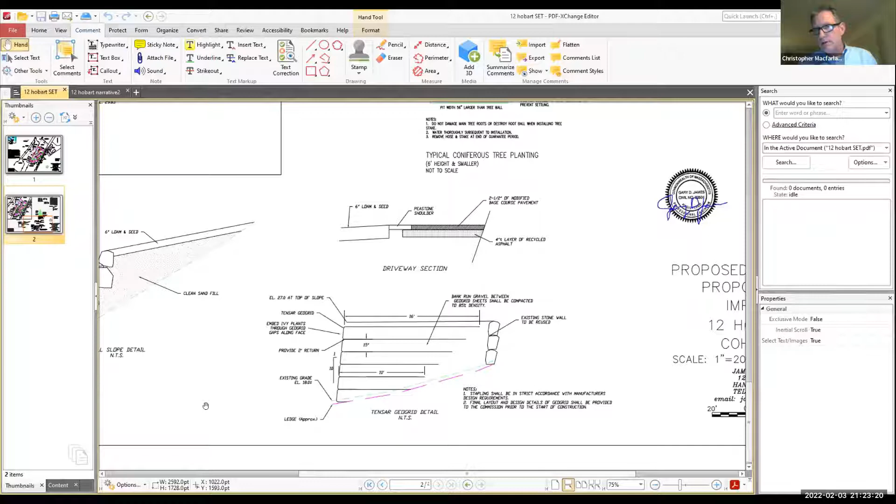If Mr. Mariah is not willing to pay, we should just go ahead and vote on it right now. Because without having this information, I can't see any change in how we would look at the project, Chris. You were not at the walkthrough, were you, Tom? No, I was next door. I went on the walk on the Schwann's property, but not this one.

All right, let's continue for tonight. Do we want to go out there and have another look? I wouldn't mind having a look at it. I think you and maybe Charlotte could go out again, and if anyone else wants to join, they could do that. So why don't we plan on that, Charlotte? Maybe you can get permission from the Schwans so you and Tom can actually walk over there. I'd like to be able to stick a shovel in it here and there myself.

Can we actually hit bedrock 2 inches down? You can, I was there for that. I don't know if it's continuous, but there was a lot of refusal. As you go further along, Tom, you'll find the Phragmites growing, and I think it's much sloppier and less ledge-apparent further along the stone wall on the left. Yeah, I'll go out and have a look at it.

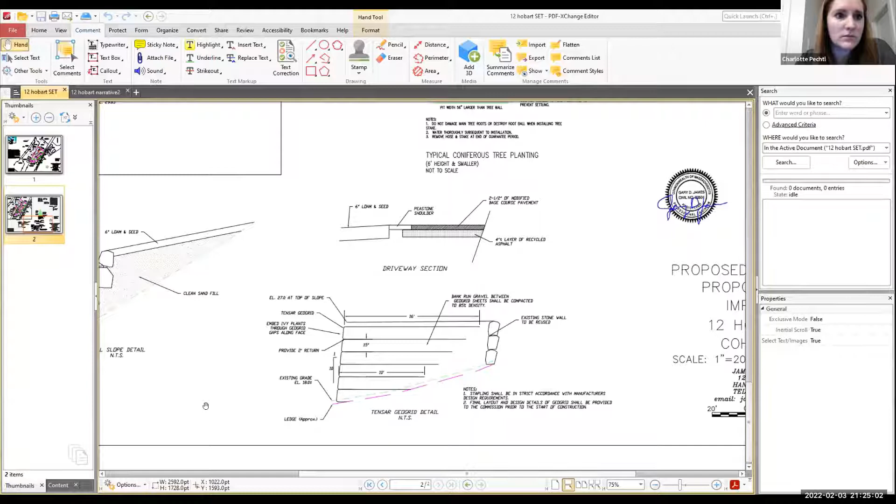Okay, great. Charlotte, you'll set that up with the landowners. I'd also like to look at, not walk all over the Schwann's property, but be able to access on their side of the property line. Sure, I can reach out to both parties to set up visits as long as consent is obtained. Okay, that'd be great, thank you.

Hopefully things will clear out a little bit out there. I bet it's pretty mucky and there's probably a lot of snow. So we're going to have to hope the weather warms up so we can actually see the ground. Maybe at that point we can outline specifically the area you're looking for the additional third-party survey, and come up with the limits. It doesn't sound like you guys are amenable to having a topographic survey, and it's not absolutely necessary, I don't think.

I will talk with my client regarding that. Tom, I'm not going to do a complete as-built on the Schwann property, but if you want specific areas on the backside associated with trying to determine whether or not there's a boundary - once I have the crew out there with an RTK unit, for them to get a few more shots and expand out to another, say 100 by 80 or another 8,000 square feet, it's not going to take them much.

You have an RTK unit? No, I do not, I'm going to have to hire a third party. The guy I usually hire for third party surveys associated with an RTK is going to be Grady Associates. Yeah, no problem, we use them all the time in terms of when we need a benchmark and to bring it into compliance with NAVD 88. We've used them in the past, so they're the ones we'll go with. But once I bring them out there, it's once they're out there, they're out there. I'll just tell them put their boots on and get out there. Okay, all right, Charlotte will set that up.

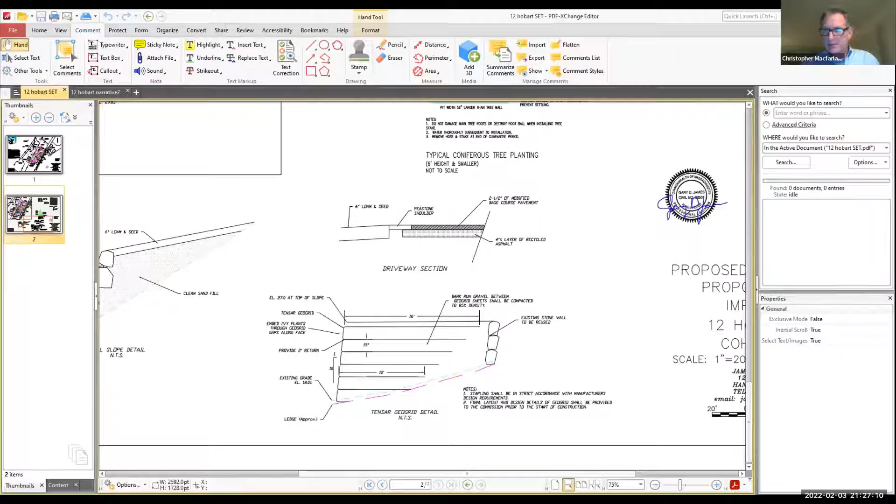Let's see, let me try to remember who was there. Tom was there. Eric was there, I was there. Kathy, were you there? Yes. Trish was not there, or you were there late, right? You're muted. Yep, I'm pretty sure I was there. Okay, Chris? Yes, I think you got there after the first hearing or something. You can vote on half of them.

All right, so did people review the minutes? Has anyone got any comments? I have no comments. I reviewed it. Okay, great, then I'll make a motion to approve the minutes for January 20th, 2022.

I have a second. Having a motion and a second, we'll take a roll call vote. Will Ashton, aye. Tom Bell, aye. Kathy Berrigan, aye. Eric Eisner, aye. Trish Grady, aye. Chris MacFarland, aye. That vote passes six-zero.

Report from Chair and Conservation Agent. I have nothing to report. Charlotte, do you have anything to report? I do, but I can keep it brief, if that's okay. Yes, please, okay just a couple updates.

We recently had a Cohasset Harbor Climate Resiliency presentation, and Tom Bell was actually one of the presenters. I put all of the presentation documents in OneDrive in that 2-3 folder under agent updates, so you guys are welcome to look at those. That's great, 'cause Tom, that was an excellent presentation, very good presentation, and I can't tell you how many people I've told about it already. Thank you. Yes, I was going to say, I'm telling everyone.